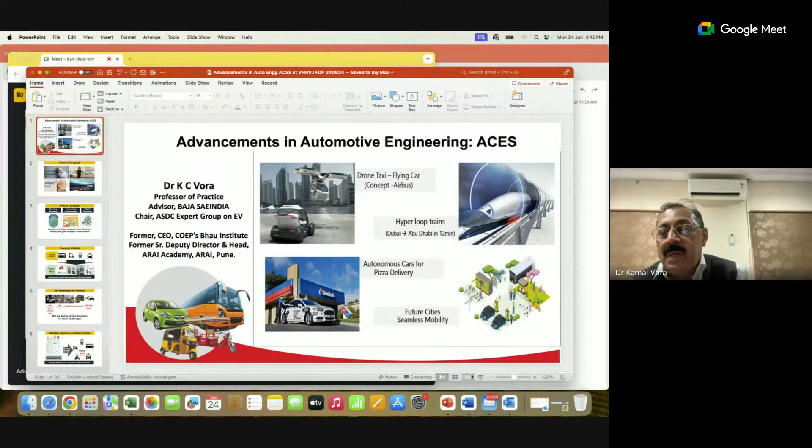So today I'm going to talk about advancements in automotive engineering, the main topic of the faculty development program. So I would try to cover various aspects of advancements in automotive engineering. And you must have heard that there are flying cars or a drone taxi. Maybe in Bangalore from Whitefield to the airport, we may use a flying car, or there are flying cars in Dubai, or we are talking about hyperloops like Dubai to Abu Dhabi, Mumbai to Pune, Chennai to Bangalore, Baroda to Ahmedabad. In future there would be hyperloop trains which can travel in 10 to 15 minutes.

We already have in Dubai an autonomous car where pizza is delivered. And we are also talking about future cities where there would be seamless mobility. There would be only electric vehicles. There won't be fuel-based vehicles in smart cities. So with this scenario, we will see that the world is continuously changing. So probably in this century, we will have someone born on a different planet. So we will be able to go to another planet and have a habitat there.

And all the products which our grandchildren will be using will be all after 2017. All those which were invented before 2017 may become redundant. That is how fast the technology is moving. The average lifespan of humans will be in 3 digits, so more than 100 years. And that's all possible because of medical technology.

And by 2040, many countries will have a separate lane for cars that are human driven. Today, all the cars are human driven, but by 2040 most of the cars will be autonomous, but still there would be one lane where the old human-driven cars would be allowed. So that is what is going to change. And this is all possible because of 3 reasons: growing economy, increasing consumerism, and digital exposure. Because of these 3 things, there has been a very big change in Asian countries. And we can say that mobility has gone through a transformation.

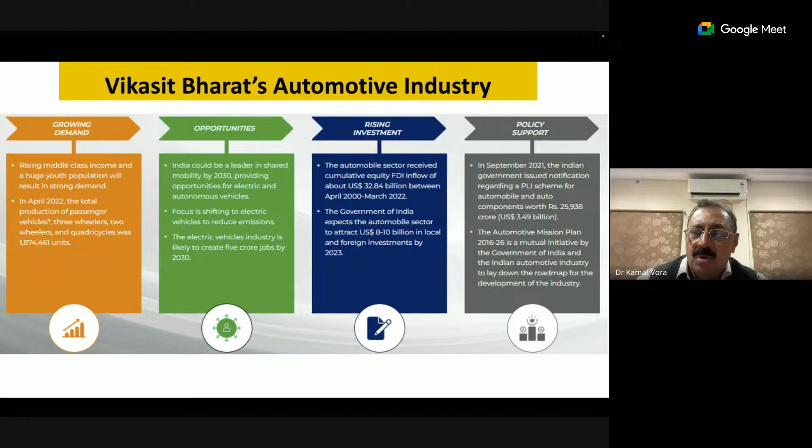If we look at the automotive mission plan, up till now we had two automotive mission plans, 10-year plans. One is from 2006 to 2016. In 2006, we were the 11th largest passenger vehicle manufacturer in the world. And our target was to be 7th largest. In 2016, we were not 7th, but we were the 6th largest passenger vehicle manufacturer.

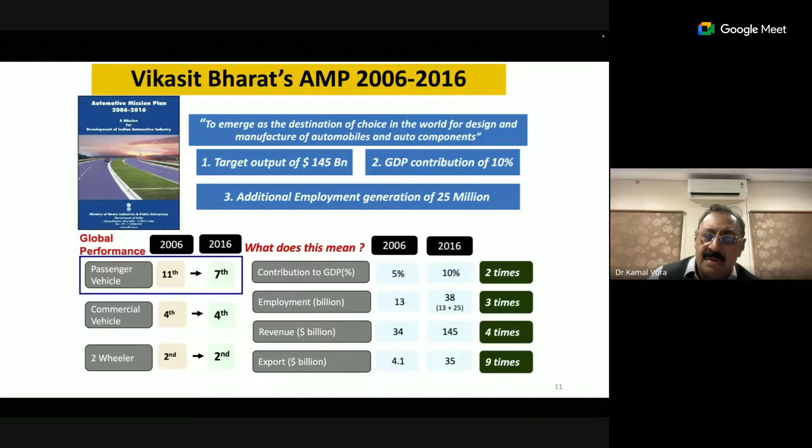We surpassed our target. And then in between 2016 to 2026, our target is to become the 3rd largest passenger vehicle manufacturer in the world after USA and China, and we are almost there. GDP in the previous 10 years was a contribution of 10%. Now the GDP contribution is expected to be 12%.

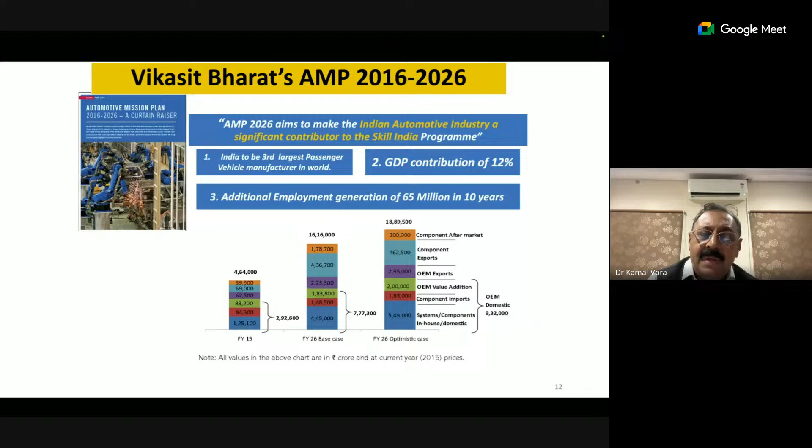We have not reached that target, but I am sure that by 2026, we will be able to reach those targets. And there will be an additional employment generation of 65 million people in 10 years. That is the target of the Vikasit Bharat's Automotive Mission Plan 2026.

So we also talk about sustainability in this faculty development program. The last word is very important, sustainability. So maintaining the capability to provide non-declining accessibility in time. Sustainable mobility means something which helps PPP: profit, planet and people. Profit means there must be economic growth and you, me and everyone in the country prospers.

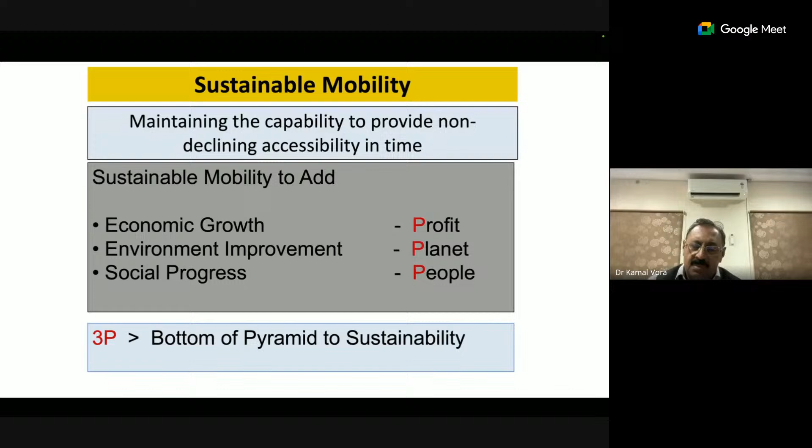Planet means we take care of reduction in noise and vibration. And social progress means the people get benefited from this. So people from the masses get benefited and have a better standard of living. So these 3 Ps are also called the bottom of the pyramid to sustainability, and sustainability is here to stay with us for a longer time.

So in the present sustainable mobility challenge, we will have to work towards all these areas which we discussed, and we need to find solutions. And the 17 sustainable development goals are some of the areas where we can work on. For example, climate action. So we must be careful of carbon dioxide, how it is being emitted, and how we can reduce the carbon dioxide content.

So if you look at the sustainable mobility challenge, climate action, sustainable development goal number 13 tells us that the overall temperature worldwide will increase. It is happening in London, it's happening in Europe, it's happening in India, it's happening in Hyderabad. The overall temperatures are higher and the summer is worse.

So it is said that around 20 to 30% contribution towards climate change comes from automobiles, and that too with around 300 million vehicles running on road with old emission norms. So global warming is a serious topic of debate and discussion across the globe, and the need to work towards a green future through climate action has become clear.

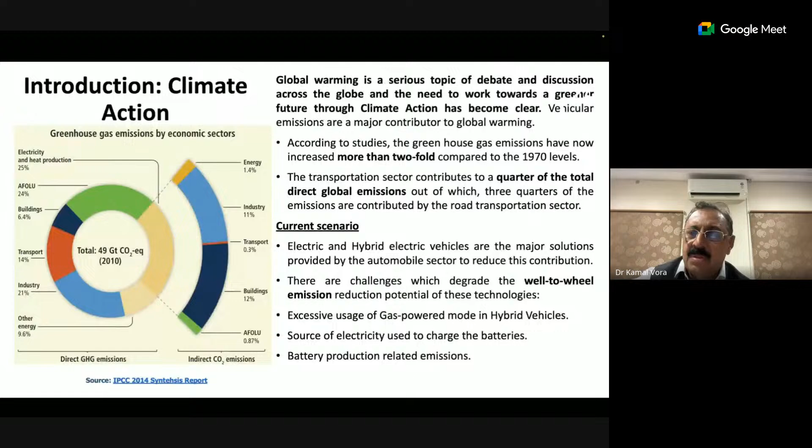So in the current scenario we have been using electric vehicles, but in future we will be using electric and hybrid vehicles. There are challenges which degrade the well-to-wheel emission reduction potential of these technologies, excessive use of gas-powered mode in hybrid vehicles, and so on. So we will have to reduce the carbon dioxide emissions, which will reduce the overall temperatures of the climate.

So a very good lesson would be the story of An Inconvenient Truth, a video which talks about frog psychology: when a frog is placed in a heating beaker, it enjoys the warmth till it realizes that the water is becoming very hot and it needs to jump out. But by that time, it has lost the energy to jump out. So we are all those frogs enjoying the warmth. And one day when we realize, it will be too late for us to jump out. And hence, it is time that we take care of our planet Earth and take care of reduction in global emissions.

Okay. So let us look at the prevailing conditions, where economic conditions are not so conducive. We have been buying crude petroleum for a long time and it's not reducing. Society is another area where, because of the increase in traffic, more and more people are shifting to cities, and there will be more traffic in the cities. And the production of two-wheelers, three-wheelers and four-wheelers in India is more encouraging.

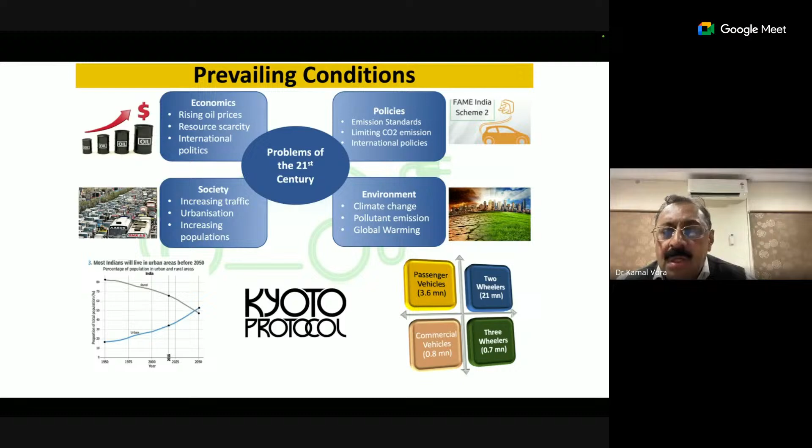So we can call this the Kyoto Protocol, and using this Kyoto Protocol, it is our duty to reduce overall emissions and carbon dioxide emissions. We produce around 25 million vehicles every year, out of which around 21 million are two-wheelers and around 4 million are passenger vehicles manufactured.

So EV has been here in India since the last 5 years, and it is the changing phase of mobility. And we are now talking about zero emission vehicles, where the rise of electric vehicles would become obvious in the 21st century.

The Government of India has come out with a series of initiatives to support electric vehicles through FAME, and the first electric mobility mission plan was released in 2011, then in 2013 the National Electric Mobility Mission Plan was published. Then we have FAME 1, FAME 2, Charging Infrastructure 1, Charging Infrastructure 2, and there has been a lot of refinement in the standards.

However, even if we are able to push electric vehicle adoption up to 64% and reduce 37% of carbon emission by 2030, FAME 2 is now over, and we are contemplating FAME 3, where hybrid vehicles would come into the picture.

Up till now, India being very conservative in terms of finance, we have been using electric vehicles, that is a battery and a motor. It's a much cheaper way. But in future, the e-kit and engine would go hand in hand. It will become a hybrid vehicle.

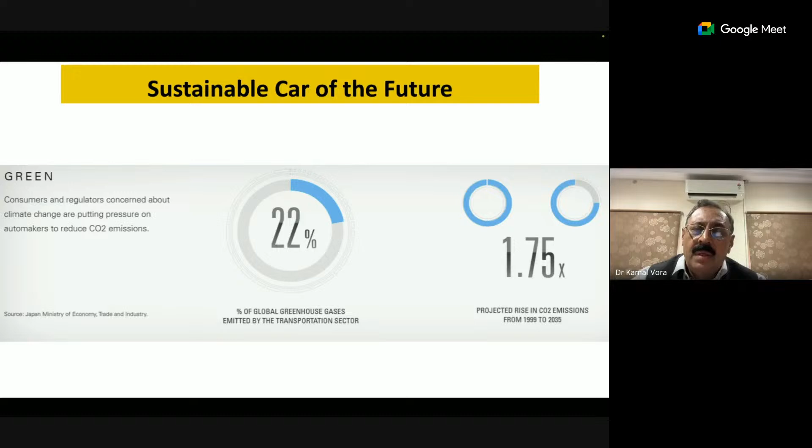Then we talk about the sustainable car of the future. As I told you, more and more people will shift towards urban population, that is 50%. We have to ensure how cars can sit unused for such a long time, and what can be done to address the energy concern.

Okay, fine, let's go ahead. Also, the car has to be affordable. So today we are selling around 7.4 million vehicles worldwide, whereas China is selling around 35 million vehicles, and the overall remaining global market is around 120 million. So we also need smarter cars.

Smart mobility is a novel and revolutionary approach to how we move around, and to the expectations and how they are fulfilled. Under the smart mobility trend, connected and autonomous vehicles will take care of basic safety, convenience and comfort of the driver, preemptive safety, seamless connectivity, and internet of the car. These are the 4 areas one has to work on to make it smarter.

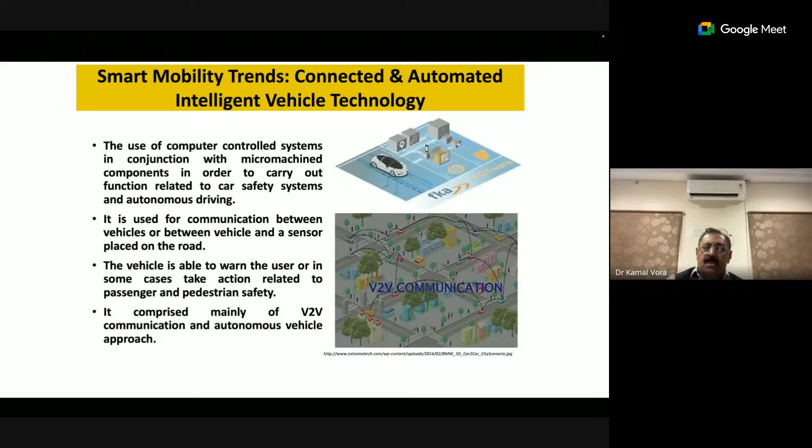So basically, V2V communication and autonomous vehicle approach will help us move in that direction. We will have to understand the connectivity and the connected platform in terms of hardware and software, and we will have to update ourselves in this area.

In terms of smart mobility trend, the connected and automated vehicle journey would start from home, go to the charging station, then pass through a tunnel, pass through an e-toll, keep on paying toll, and then there is a hotline.

So what are automakers doing? Automakers are working in all these areas, whether it is monetization, privacy, user experience, or global design. All these areas one has to work on to become a successful automaker.

Similarly, in terms of connected and autonomous vehicle, what does the platform help achieve? So whether we require a platform or not - if we have a platform, then we are taking care of safety, security, and sustainability consciousness. This platform will help us achieve benefits to the customer and benefits to the OEM also.

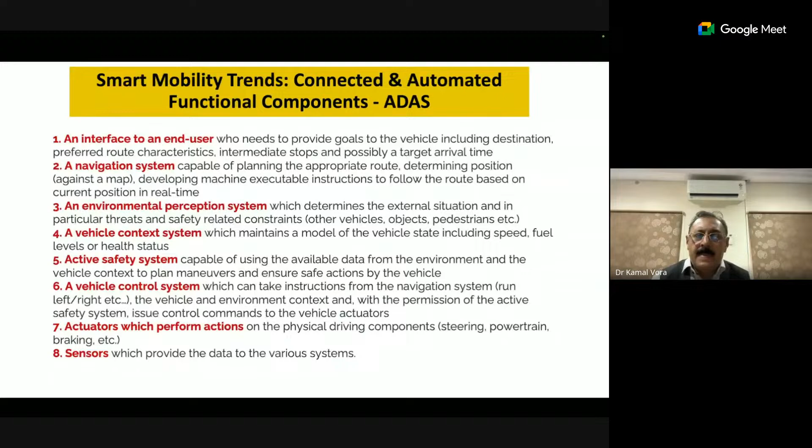So what is important is that you need to work on an efficient strategy where you can target level 3, which is the most suitable for India today. We have cars with level 1 and level 2, but level 3 is difficult to achieve - though we are all moving towards it.

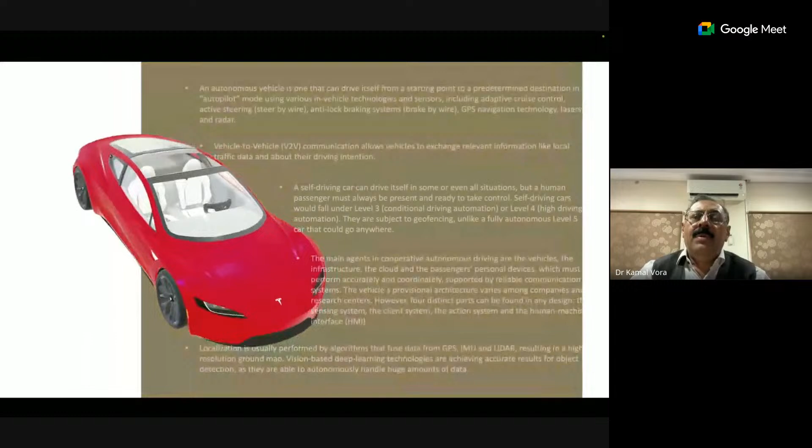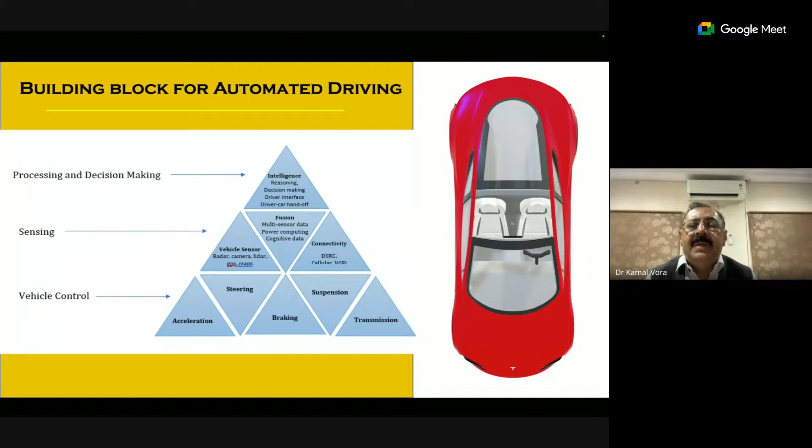So looking at the autonomous vehicle, we need to work on vehicle-to-vehicle communication, conditional driving automation, and human behavior. We will require 3 areas: vehicle control, meaning use of actuators and throttles for steering and braking, with throttle for accelerator already there; various sensors required, whether vehicle sensors like radar, camera, lidar, or connectivity sensors; and fusion, where multi-sensor data, power computing, and cognitive data fuse.

So we need to work on the logistic infrastructure, and how we can give more work to certain people at the strategic level is very important.

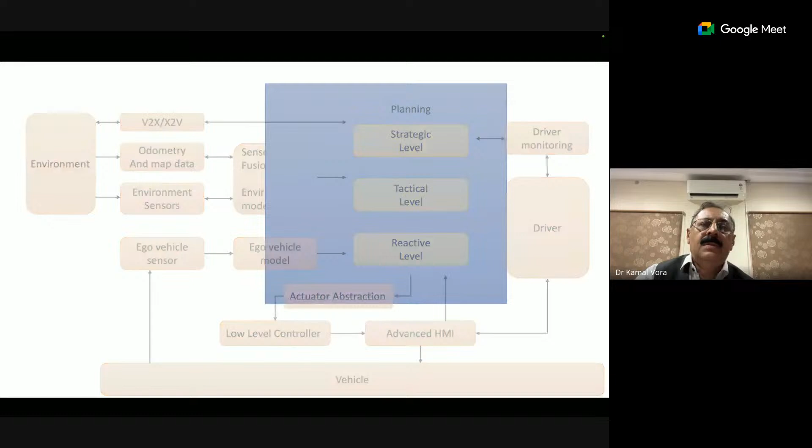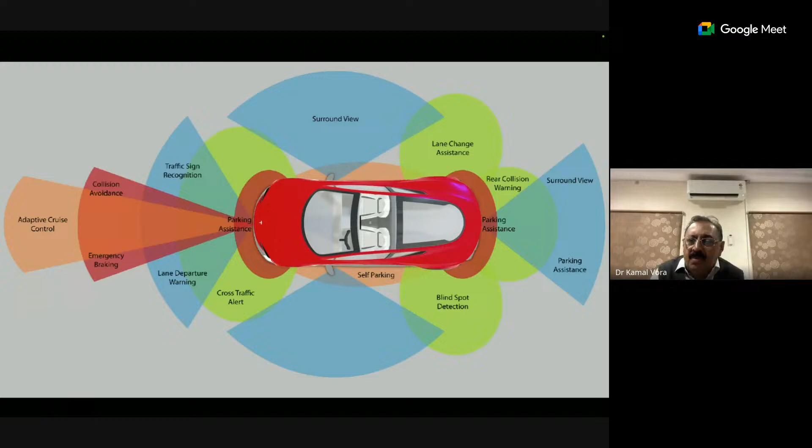So the car will have cameras, radars, and lidars, and the car will be intelligent enough to understand what is in the rear, what is on the side, and what is in the front, and what precautions are required to be taken.

So when we are talking about radar, lidar, and cameras, then we must know how to fix them, where to fix them, and how to use them.

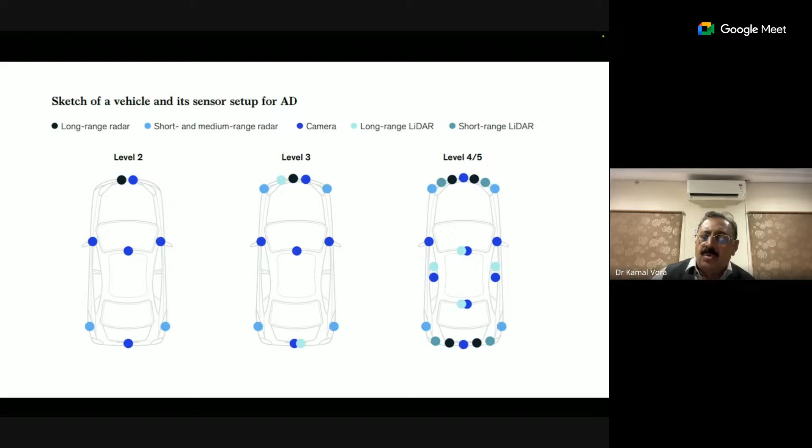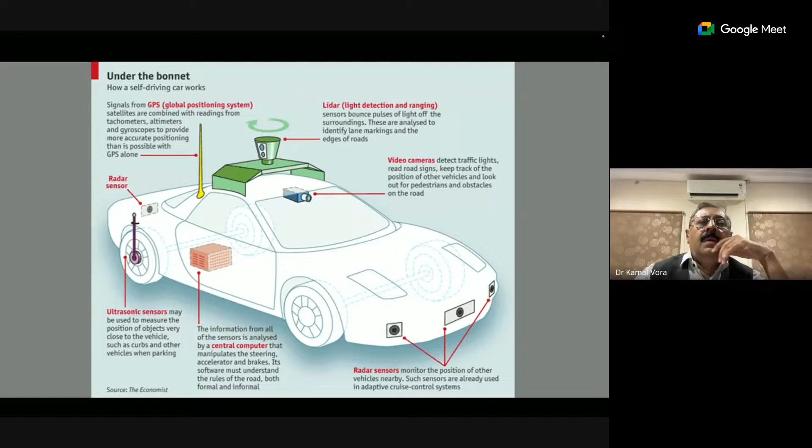Various technical features of an autonomous car would be adaptive cruise control, autonomous emergency braking, blind spot detection, electronic stability control, lane keeping assist, reverse park assist, rear cross traffic assist, and so on.

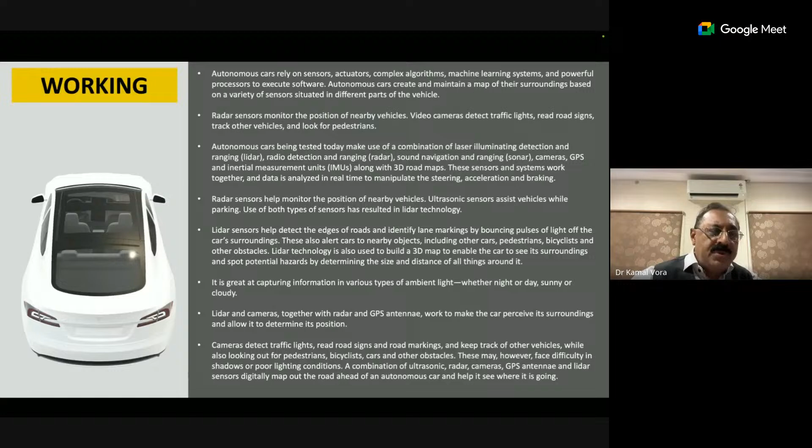So this is how the car will look like from the rear.

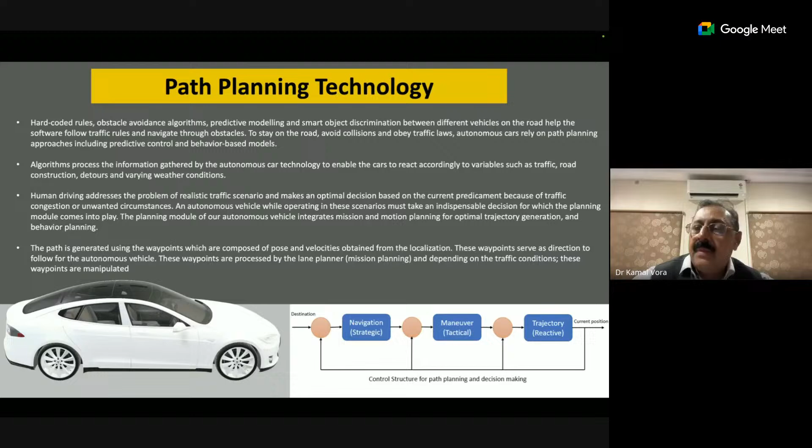We will have to work on the control structure in terms of navigation, maneuvering, and trajectory, and then work on various sensors and their data fusion, and the various techniques used for fusion technology.

So we will have to move from autonomous car level 2, which talks about ACC and lane keep assist support, and then move towards higher levels like integrated cruise assist, highway pilot, autopilot, and so on.

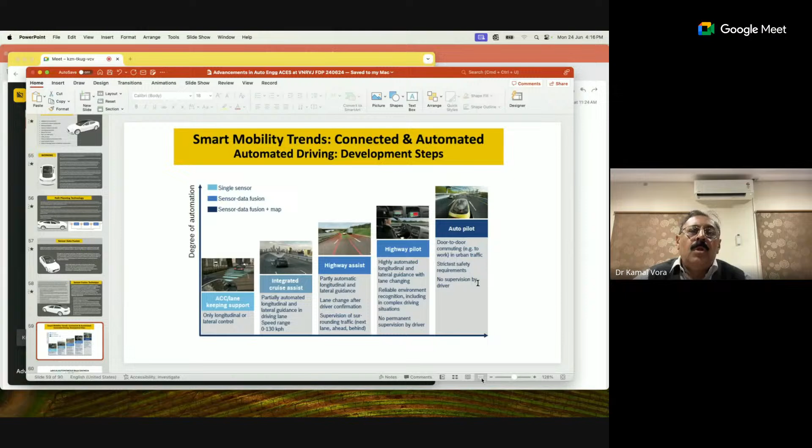Autonomous technology is here to stay. The Government of India has still not approved autonomous technology for our cars, but I am very sure autonomous vehicles would move in some confined areas, like in Bombay where there are two airports, one domestic and one international, with a separate road connecting them, where autonomous vehicles may run.

So we have also started a competition called A-Baja, Autonomous Baja, where any engineering college students can participate.

Students will make a Baja buggy which will run on its own, stop on its own, and work on various commands given to it. The primary objective of Baja is learning and making students industry ready.

For that, we use an all-terrain vehicle. We have a Baja rule book which is updated every month, along with out-of-classroom education.

Baja would bring further development. We started with M-Baja and E-Baja, but I am very sure that last year, when we introduced H-Baja and A-Baja, hydrogen Baja and autonomous Baja, there was more participation.

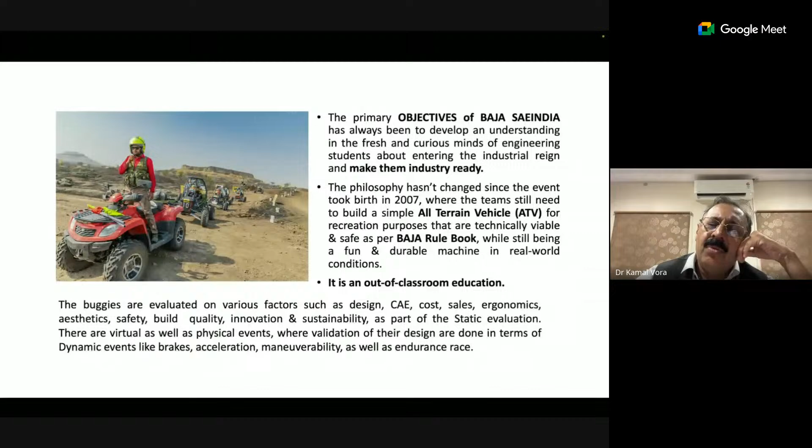I will quickly talk about autonomous Baja and hydrogen Baja, the two new technologies many of my predecessors talked about. In a Baja vehicle, there is a roll cage which needs to be ergonomically designed, and the single driver sits inside and checks his ergonomics.

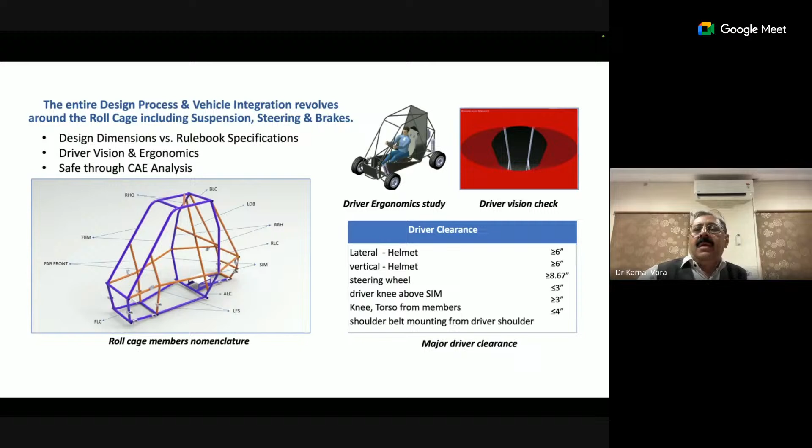Then we need to design a system with a vehicle weighing less than 164 kg, with a particular lithium-ion battery, motor, and controller.

So we are talking about systems which are level 3 automation, and that will go a long way. They use sensors, and various software and hardware would be required for level 3 automation.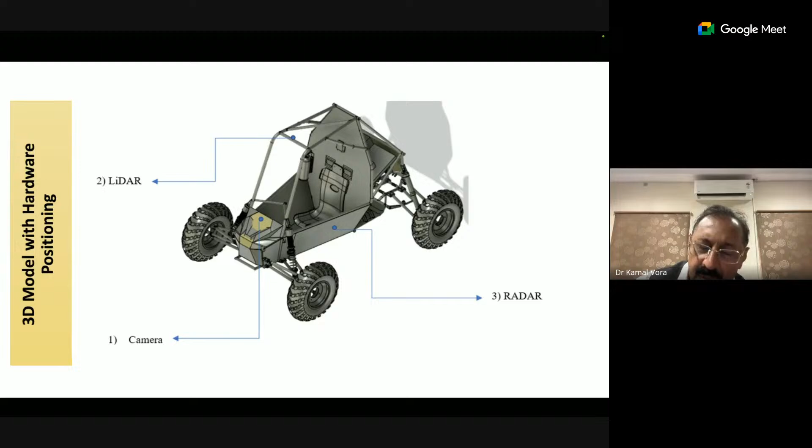The present system may have a LiDAR and/or radar and camera, and so on. Using this 3D model, we need to integrate it with the 2D model, and here you can see how a vehicle can be modeled using IPG CarMaker.

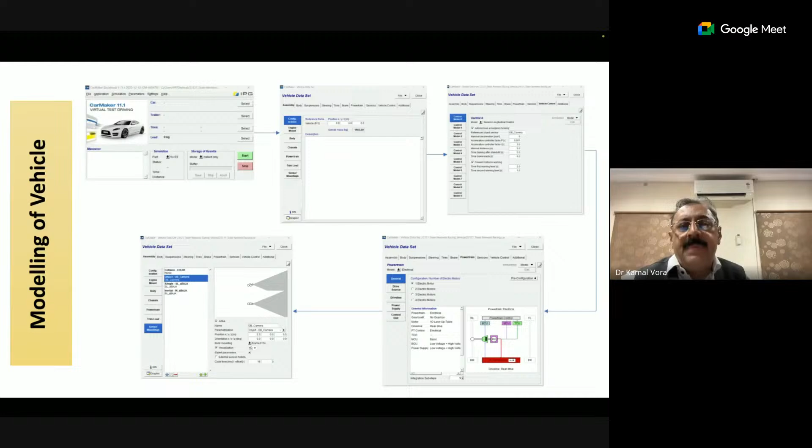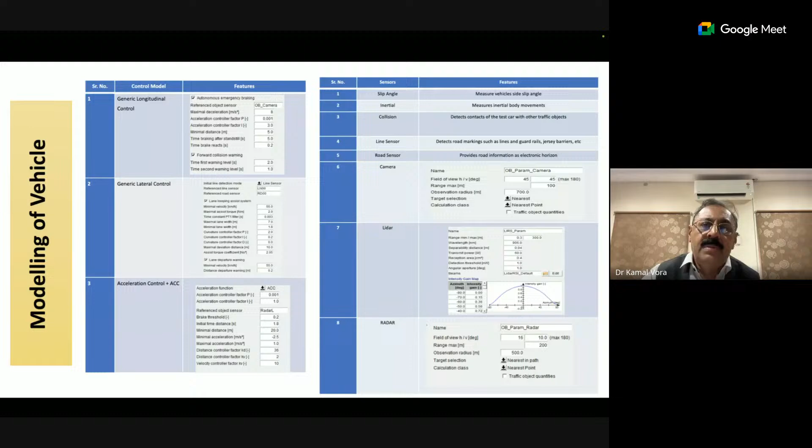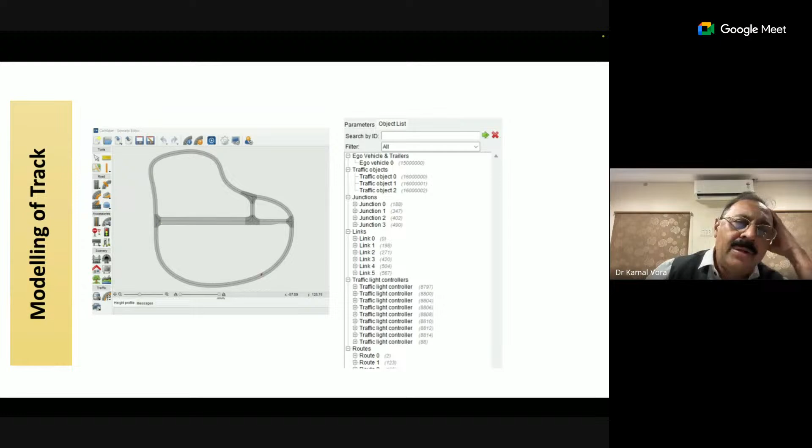So modeling of a vehicle would require generic longitudinal control, generic lateral control and acceleration control, and we will have to use various sensors and actuators to make this happen. So we need to model a track, we need to model a vehicle, we need to model a driver, and then the model driver will run on the model track using a particular algorithm and maneuver. So when you model a track, you can also model a car or deer or a man crossing the road.

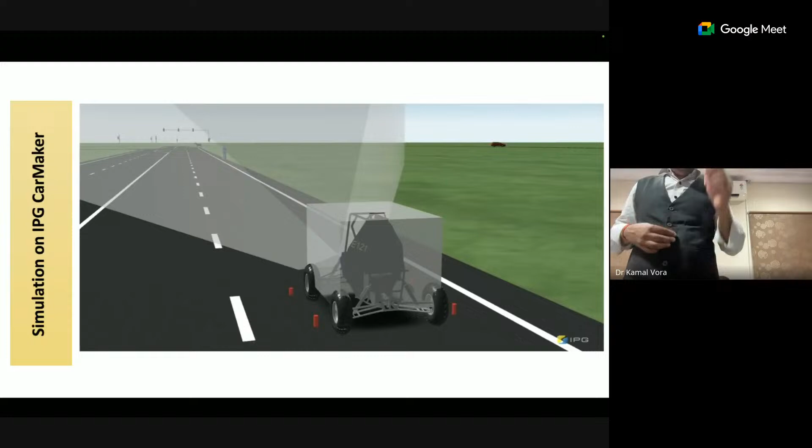So I would just like to show you a couple of animations. We are almost done. So here you can see the car is moving in a straight line, and far away you can see a pedestrian ready to cross the road. And now the pedestrian is about to cross the road. Here it enters the road, and because of this the vehicle is forced to stop. And now the pedestrian has left and the vehicle can move ahead till it comes across the next pedestrian.

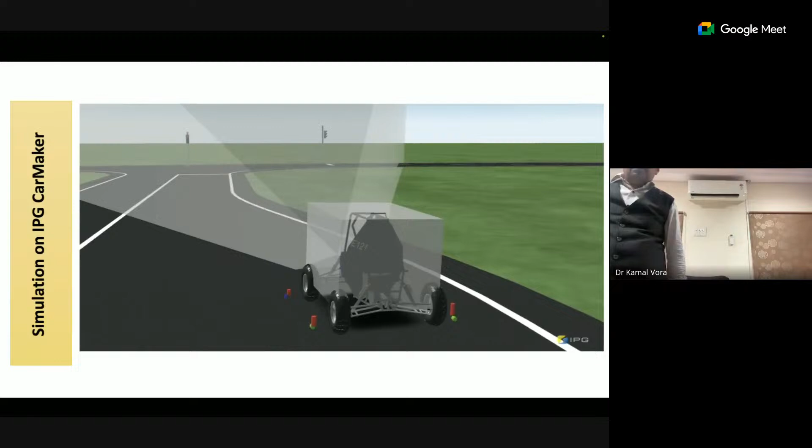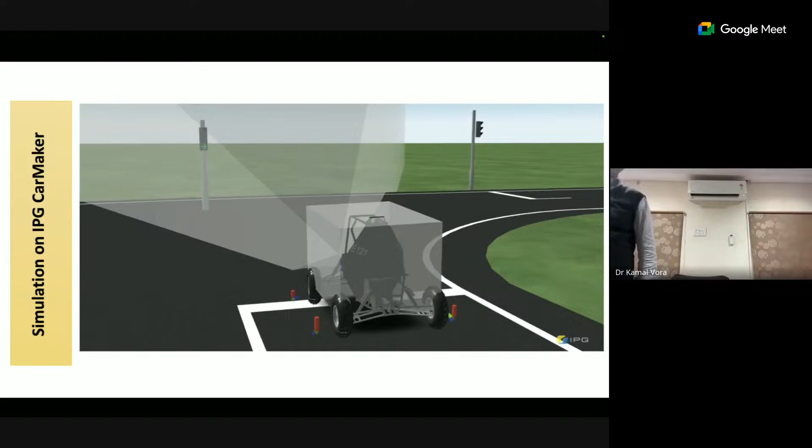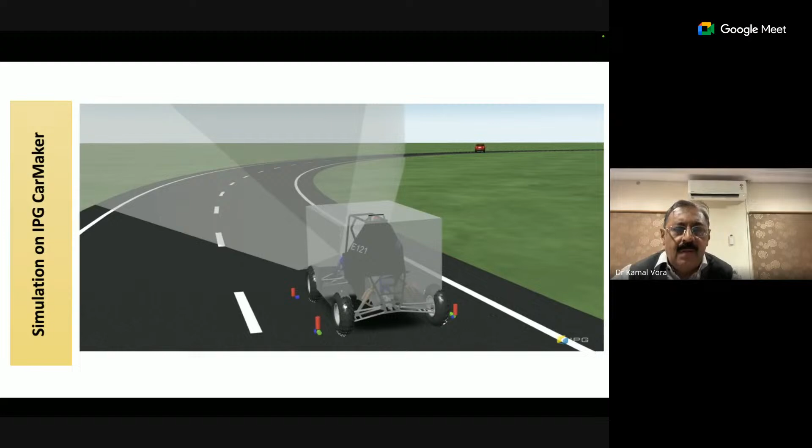So the car is moving in a straight line and you can see a red signal. The car stops at the red signal. And then when the signal is green, the car will move forward and take its own course, say the left course, to reach the hotel. Yes. The car has taken a turn and moved forward. Okay, so this is how you can use IPG CarMaker to model a track, the driver, and the vehicle itself.

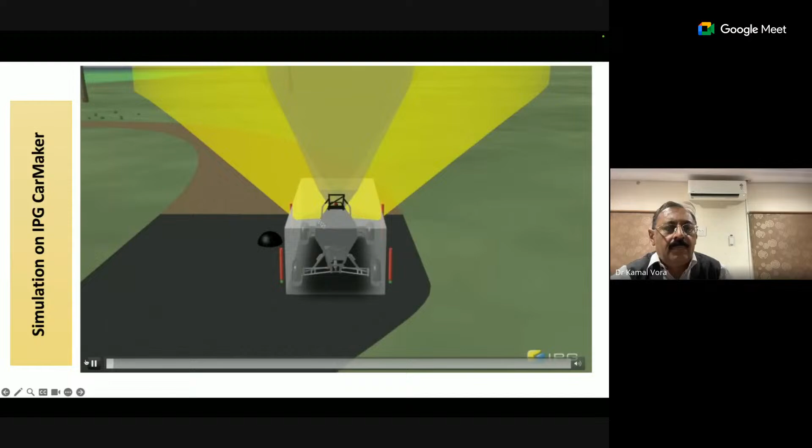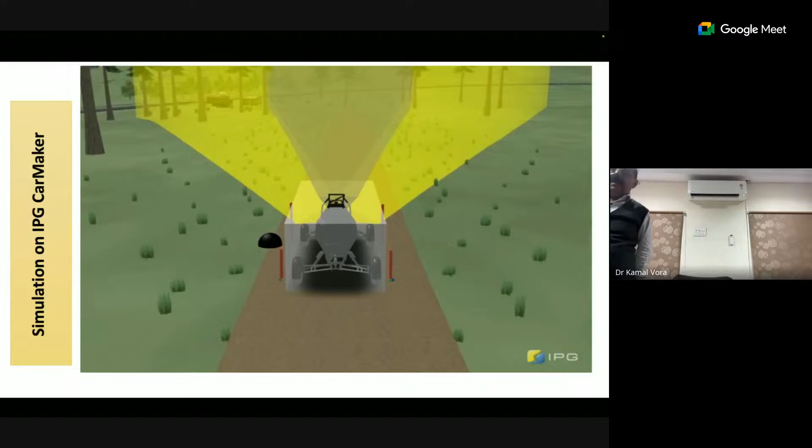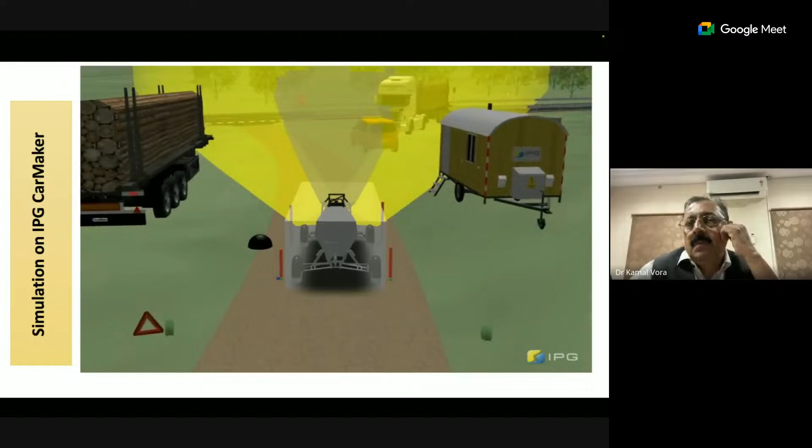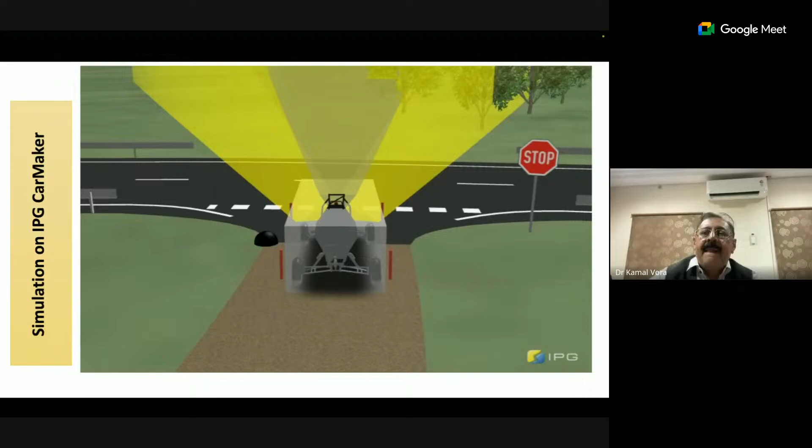So let's see one more simulation. The vehicle is moving in a straight line and then taking a turn. And then it is controlling the headlights, and it is also controlling what it can see through the camera. Here it is stopping at the signal, waiting for the signal to become green. And when the signal is green, it will move to its left. Okay. So that's about autonomous cars and how they behave.

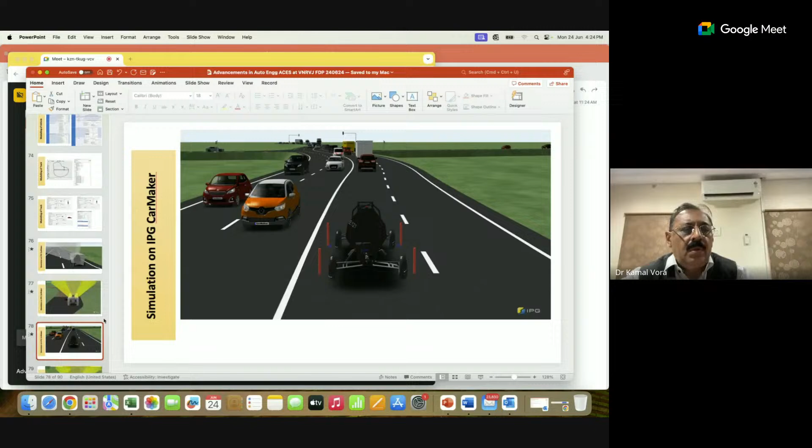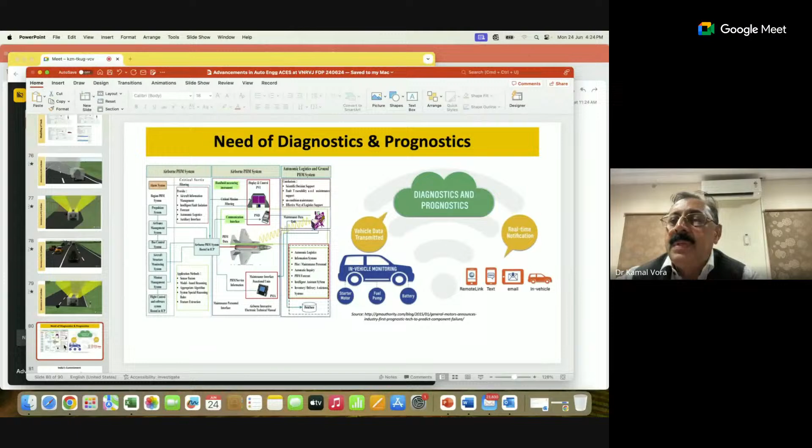Okay. So there is a need for diagnostics and prognostics, and we need to collect vehicle data in a black box, which can be retrieved later on, and the notification should be real time. So this is about autonomous, and now I have around the last 10 slides where we talk about hydrogen. So electric, shared, autonomous and connected vehicles are here to stay with us, as the roads become better, and maybe some roads would be used only for autonomous to start with.

India has a commitment. Our Prime Minister has given a commitment that India has set its sight on becoming energy independent by 2047. Today we are in 2024, and by 2047 we are going to become energy independent, and we will also achieve net zero by 2070. We recognize the critical role of green hydrogen. So India, with its vast renewable energy resources, also has the opportunity to produce green hydrogen for the world. So green hydrogen can be produced using electricity.

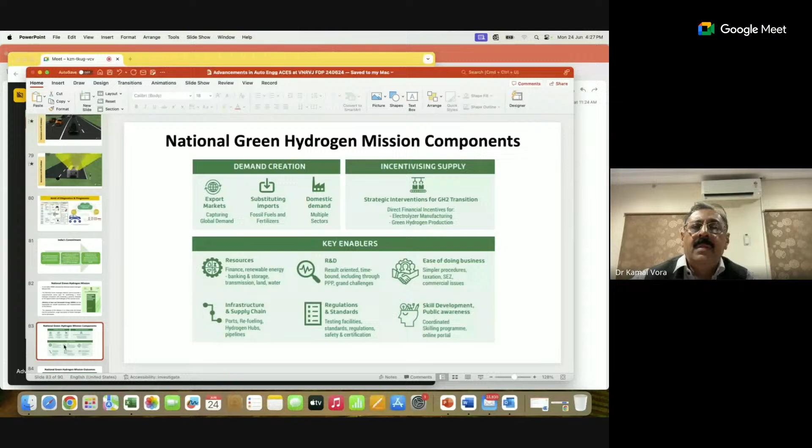MNRE will take care of this mission, and the objective of the mission is to make India a global hub for production, usage, and export of green hydrogen and its derivatives. Okay. So there are various mission components. There is a need to create demand, there is a need to incentivize the supply, and then there are key enablers. So under the National Green Hydrogen Mission, the expected outcome will look somewhat like this: 5 million metric tons per annum.

Then renewable energy, 125 gigawatts, and against this, 50 million metric tons per annum, and create more than 6 lakh full-time jobs is the idea under the Green Hydrogen Mission Plan. So in the landscape, somebody will work on generation of electricity and use of electrolysis for production of hydrogen, or storage, or the application, based on which you would get experts to work on it.

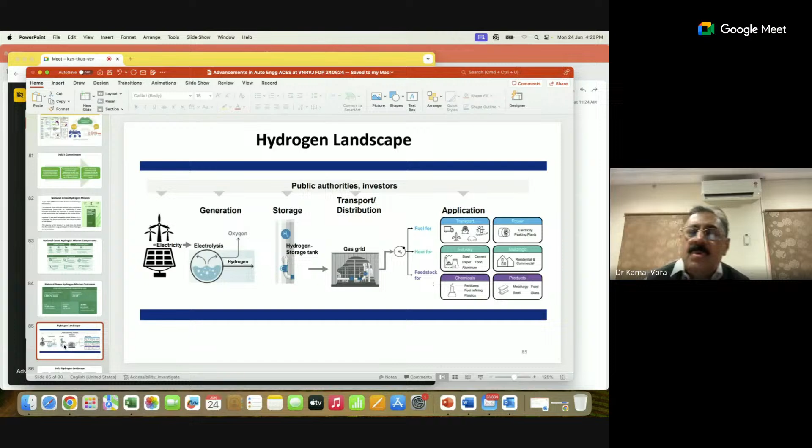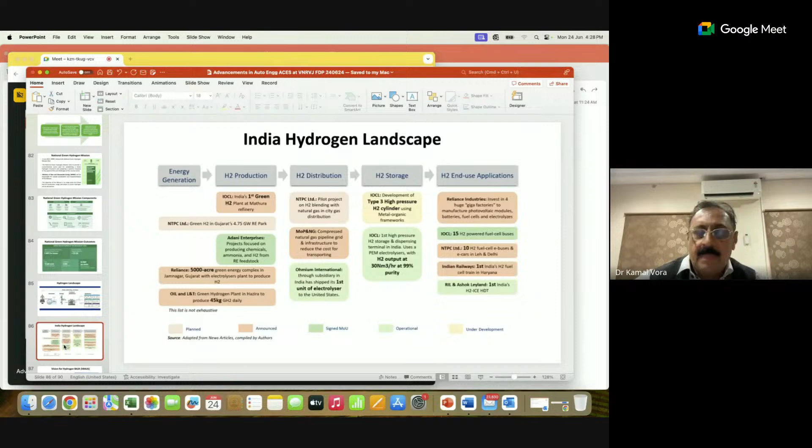Okay. So India's hydrogen landscape looks something like this, where we are talking about energy generation, hydrogen production, and so on. So finally, it is the hydrogen which is used by the end-use customer. Okay, fine. So I talked about autonomous BAJA. Quickly, 3 slides on hydrogen BAJA.

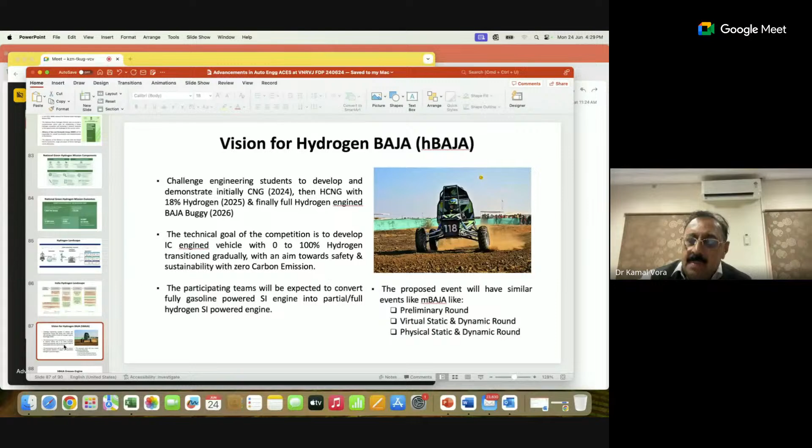We started in 2024 with 100% CNG. In 2025, we will be using HCNG, that is hydrogen in CNG. So up to say 18% hydrogen would be allowed to be used in a CNG vehicle, and still it is safe, but it is not 100% safe because hydrogen is something which you cannot smell and you cannot see. So that is the registration of the preliminary round of hBAJA.

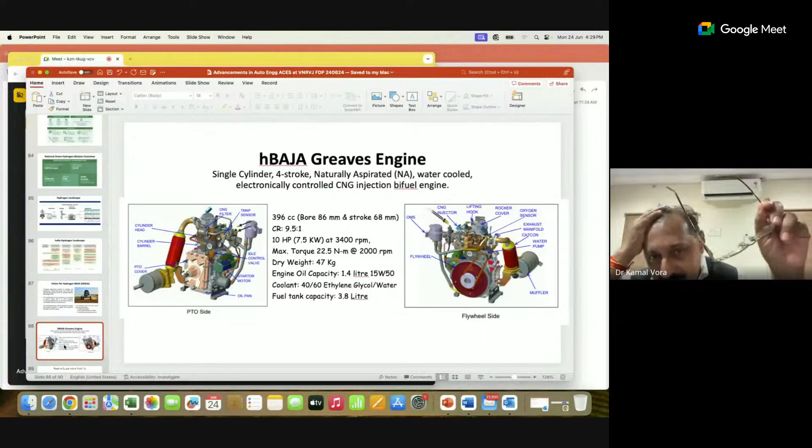Then for use of CNG or hydrogen, we require a fuel-injected engine. So we worked on an old engine and converted that into a fuel-injected one. And we used a Greaves engine, a Greaves 3-wheeler engine, which has around 10 horsepower.

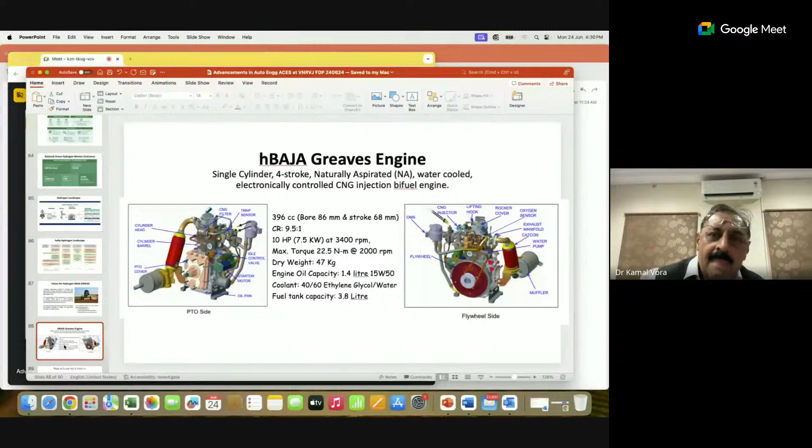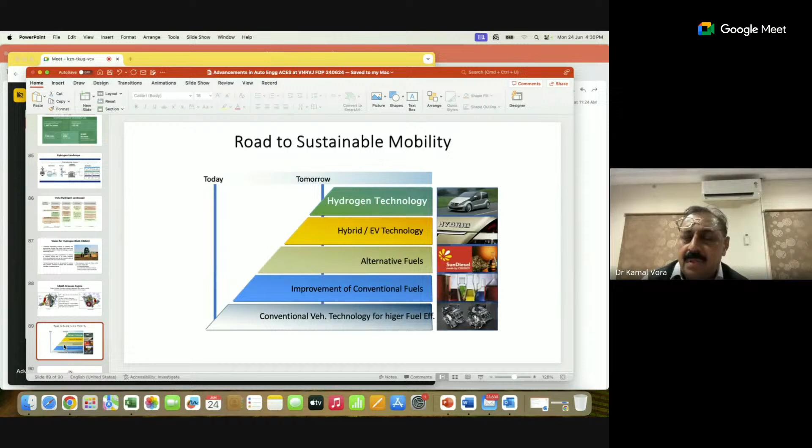Okay. So it says that if you want to move towards sustainability in automotive engineering, we started with conventional fuels, which were coming from crude petroleum, and then we started working on improvement. Much improvement was not done, but now we can see the after-effect of all this technology. So we can use alternate fuels, we can use hybrid and EV technology, but in future we would be using hydrogen technology, and that is what seems to be the future.